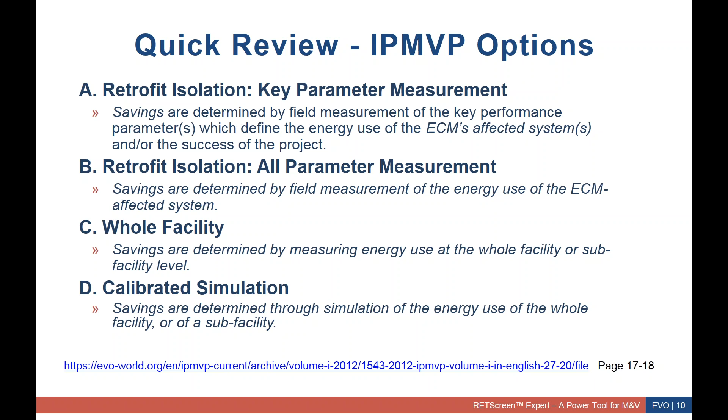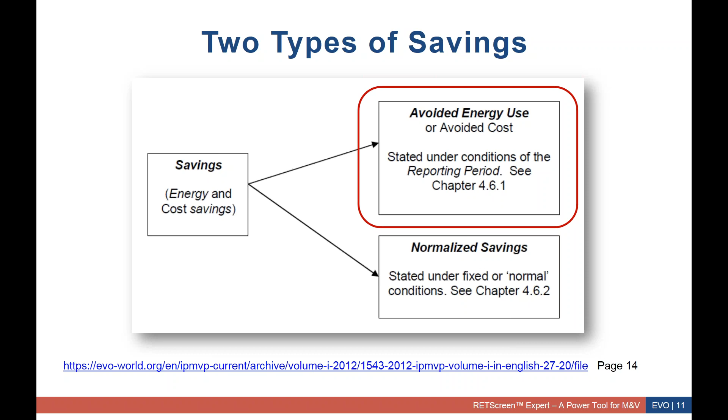On the next slide, I just want to make a point, referencing this again back to IPMVP. There really are two types of savings: savings stated as normalized savings, or avoided energy use, avoided consumption, avoided cost. In RETScreen, we are largely going to focus on the first type here, that is avoided energy use and hence avoided cost, stated under the conditions of the reporting period but measured against the baseline performance. So just to reference us in this, again using IPMVP as our reference here.

Kevin, over to you. Later on in the webinar here, we'll actually share with you a paper—some of you may have seen it already. It gave rise to this webinar. In that paper, Kevin actually broke down how energy would be M&V'd using RETScreen, and that's the next slide. We'll give that paper a reference later on. I think it was in the announcement for the webinar as well.

Yeah, thanks, Stephen. So the genesis of this webinar and the paper it comes from is that one of my roles in RETScreen is to help customer support. When you write to our general RETScreen inbox, I'm one of the people who gets those emails and reads them. Over the years that I've been working in RETScreen, as M&V has taken off and grown in popularity, and people are doing it more and more, I saw a lot of questions where people would do option C, the performance analysis—we had RETScreen Plus many years ago that came out and did that. But there's other options in the IPMVP M&V method, and when people would ask questions, I would always turn to the parts I was familiar with in RETScreen to help answer them.

I sat down with my colleague, Farah Sharif, and we said, is it possible to go through the other options—A, B, C, and D—with the various parts of RETScreen that would satisfy those options in terms of determining savings. What we realized is that as RETScreen has grown over the years, there's lots of different parts of the software that aren't necessarily known to everybody who may be focused mainly on performance analysis and baselining. So we decided to describe that.

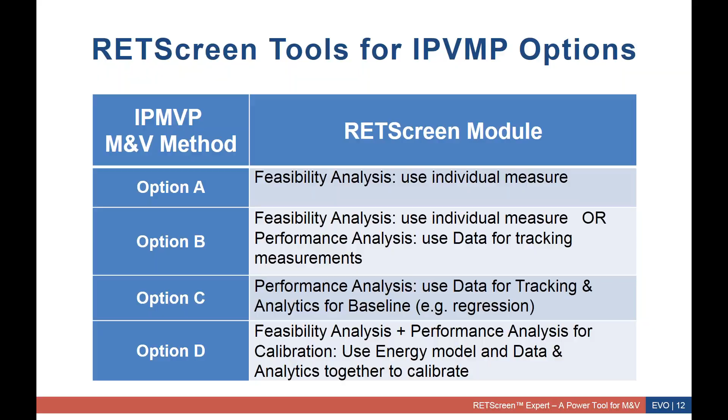So the next part of the webinar, we're going to show an example for each of these four options. So let me do that right now.

Just as a quick overview, I'm going to jump into the software in a second here. For option A, the isolation method, we're going to consider a lighting retrofit. We're going to switch to a more efficient light source, and we're measuring the watts, the electricity load on the lighting system. We'll say the hours of operation—we're not changing anything else. We're not putting in occupancy sensors, we're not changing how often the lights go on and off. All we're doing is changing the lights themselves.

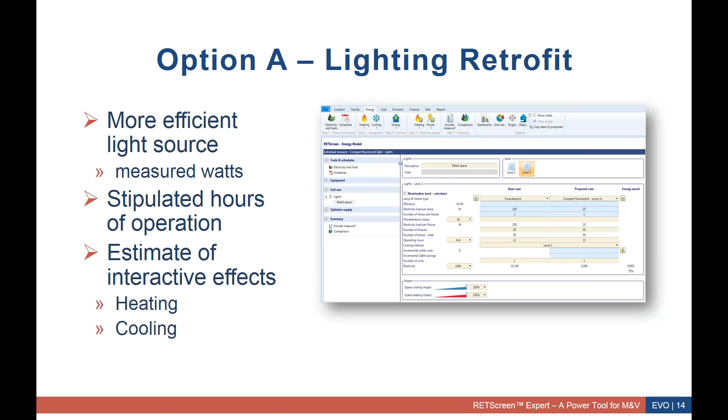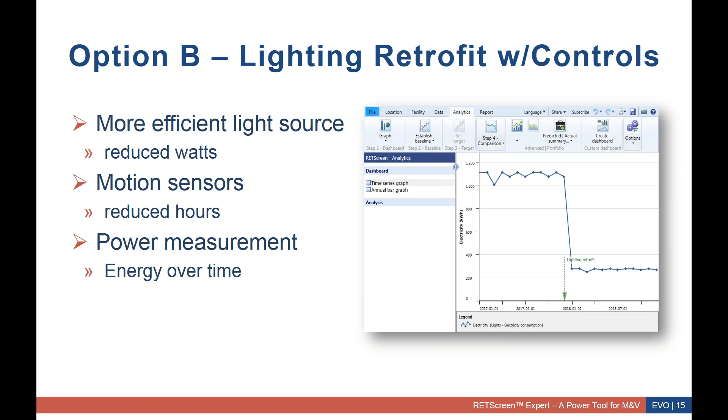We'll also get into a brief discussion on the interactive effects of lighting being in a building and how that affects the heating and cooling as well. Then we're going to look at what if we change more than just the lights—say, a control system as well. So in addition to reducing the number of watts, we're also reducing the number of hours those lights are on, and we'll measure the power measurement, the energy over time. So let me jump into the software now.

So I have RETScreen open, and I'm live in the software now. What I'm going to do is option A, a lighting example. That means I don't necessarily want to model a whole building, I'm going to do an individual measure.

If you look at that table I showed before, option A has beside it 'feasibility.' I could either start with a blank feasibility, or I sometimes like to use just an individual measure here. So I'm going to click on individual measure on this right-hand menu, and RETScreen will load up a blank individual measure template for me. It locates the project and puts in some climate data. We have a couple of videos describing what's on these various pages, and we can also go and describe the facility.

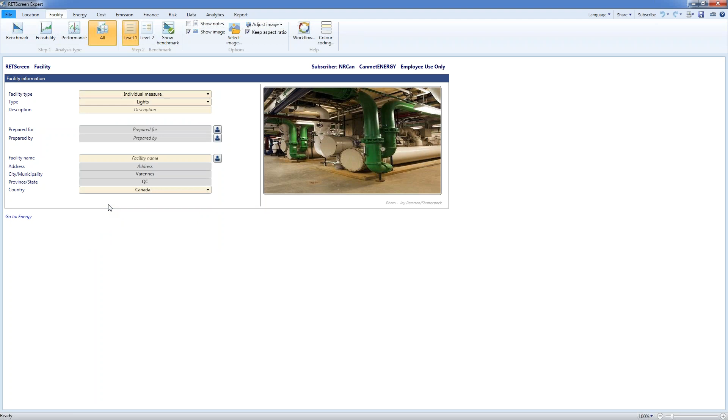In our case, we're going to do an individual measure, and we're going to be changing the lights. We should probably put in some information about our particular project. We can even take a picture, say, down the hallway. Let's suppose we're looking at a lighting retrofit project, changing out some lights in, say, a retail space. So now the main part of the energy modeling is done on the energy page in RETScreen.

I'm going to zoom this up a bit so everyone can see. On RETScreen, you start off and make sure that we have our electricity and fuel. A lighting project obviously takes electricity, so we'll make sure we have our proper electricity rate here, 10 cents.

We won't use the schedules quite yet, and we don't need to worry about heating or cooling equipment. But as you'll see near the end of this webinar, you really can build out a whole building, a whole facility, using all of these options. We're going to be focusing just on lighting here.

So I'm going to go to Step 3, end use, on the energy tab and click on lighting. You'll see the various individual measures we spoke about are here - building envelope and ventilation, electrical equipment, hot water, pumps, fans, motors, VFDs, and so on. There's a lot of things here. Let's focus on lights for now.

So let's click on lights, and what will happen is RETScreen will load up the lighting submodel. This is the lighting submodel here, and we have the opportunity to write a description. So we're going to say it's a light retrofit, for the EVO webinar, in the retail space.

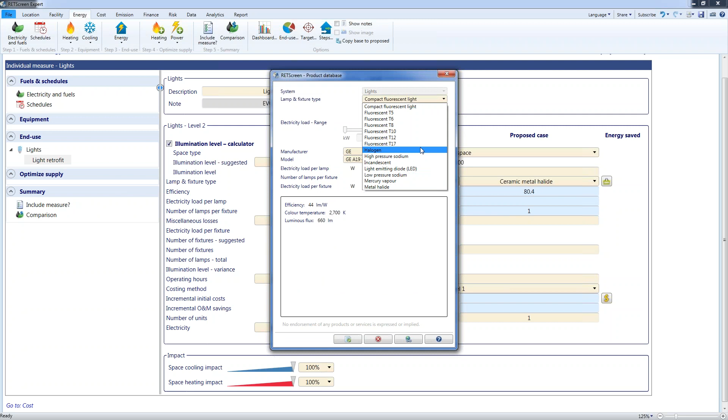As I change some of these values, RETScreen will automatically, from its lighting database - remember I mentioned we have a product database - put in a generic or typical lighting efficiency for an incandescent bulb. And if I click on this product database, I have access to a whole plethora of various lighting types and data points in here, a couple thousand different entries. And of course you can customize that with your own.

So let's continue down this base case. I have incandescent bulbs, they're 100-watt bulbs, and there's 1 lamp per each fixture in the ceiling. I don't have any other losses to worry about. And I go around and measure, say, my corner of this building, the store, and I see that there's 30 fixtures.

RETScreen will confirm that there's a total of 30 lamps being used, because there's 1 lamp per fixture and 30 fixtures. I go around and know that this building is open for 12 hours a day. So after I've done that, RETScreen calculates that the electricity required for this lighting, these incandescent bulbs, 30 of them, for a year at this usage rate is 13,140 kilowatt hours. So now let's do the proposed case.

What we're doing is an energy efficiency measure. So let's see what we're going to improve and change out the bulb. The first thing we say is, can we get away with a few fewer bulbs if they're more efficient? We say we're actually over-illuminating here. Maybe we really want to keep this at 500 lux.

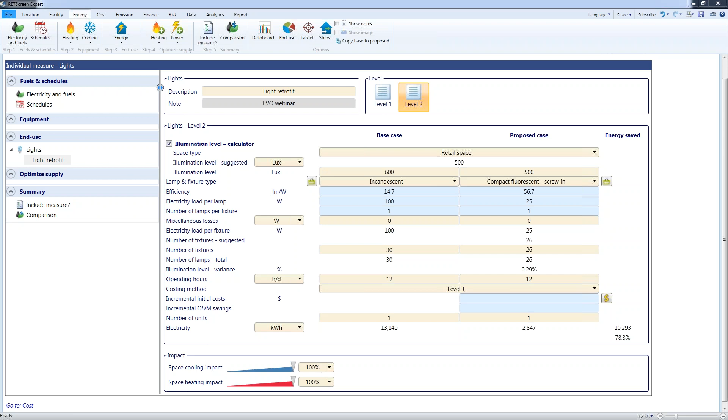I'm going to basically start off where Kevin finished up. So here's our retrofit. Now, Kevin mentioned earlier that you can, in fact, build a whole building and simulate the entire building. We'll see that in a moment—excuse me, I need to show my screen here. So where Kevin left off, we can simulate an entire building, but in this example we're going to start out with this single measure that Kevin created, and we're actually going to build the building around it.

But in order to estimate the impact of the interactions between cooling and heating, we will not need to build an entire building. We simply need to create a valid heating and cooling load within the building, which these lights can then interact with. So I'm going to begin by moving up to the electricity and fuel section and making sure that I have electricity and fuel specified here.

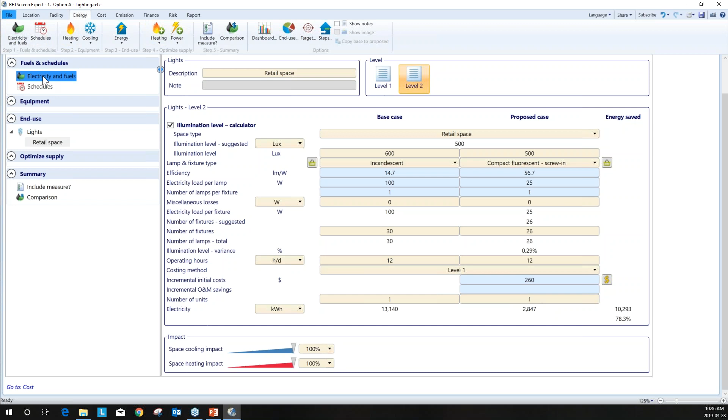So I have natural gas as my heating fuel, electricity as my operating—obviously the lights, but also the cooling systems. In order to build out a building, I need schedules. So in this simple example, I'm going to specify a 24/7 schedule where we're heating the building to, say, 20 degrees C, 24/7, and in cooling season, we'd be cooling it to a temperature of 24 degrees C.

Now, recall that when Kevin started off this project, he identified that there was a location here, and that location will specify for us the climate data.

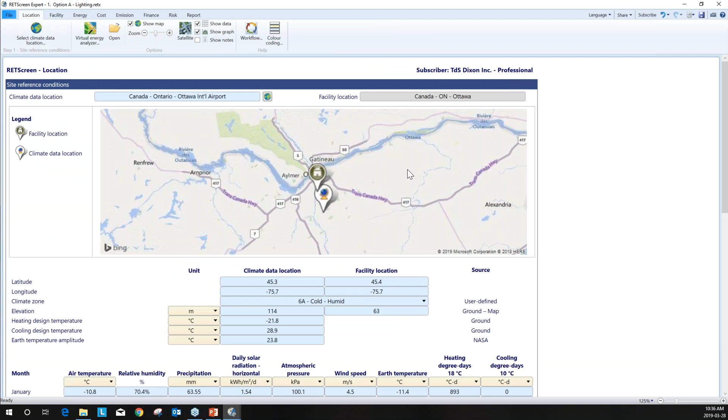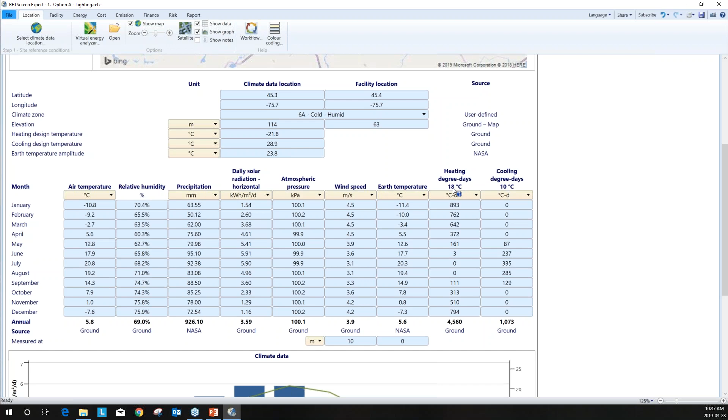There were a few questions earlier about whether RETScreen can deal with different locations. RETScreen has a climate database that covers the entire world. When we move into the option C example, we'll be working with weather data - that's actual weather data, not the long-term averages which is what climate data represents. RETScreen uses a NASA database which covers the entire world at a half degree by half degree grid, so wherever you are in the world, you can get data for your particular facility, which saves a lot of time.

Back into my energy simulation. The next thing in the schedules I have to do is tell RETScreen when this building moves from heating to cooling. This isn't exactly a balance point temperature for heating or cooling, but it's akin to it. In this case, we're going to specify a number of 16. If our building moved from heating to cooling at a higher or lower temperature, we could adjust that slightly back and forth from this point. But this is a good starting point for this particular kind of analysis.

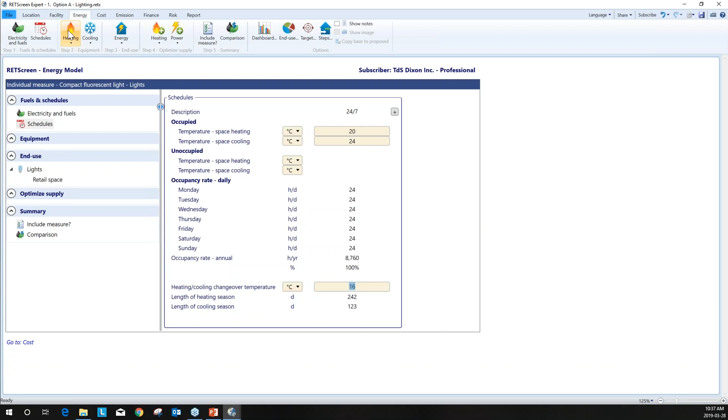So now we have schedules and fuels. Now we need to put a boiler into the building to heat it, so I'm going to add a boiler. RETScreen can allow us to provide a lot of information about a boiler, but we don't need all of that for the actual simulation we're going to do. We simply need to know the fuel to heat efficiency of the boiler, so I'm going to use a number like 75%. RETScreen also makes it easier for us to make our base and proposed case the same, so I'm going to copy base to proposed to make sure these are identical. Now I have a boiler in the base and proposed case of identical efficiency.

Next, I'm going to add a cooling system. I'm going to use, say, a rooftop unit driven by a compressor - we could call this the RTU cooling. Again, as with the heating system, I don't need a lot of information, just the key information as to the performance or efficiency of this particular piece of cooling equipment. I can specify it as an EER ratio or as a COP.

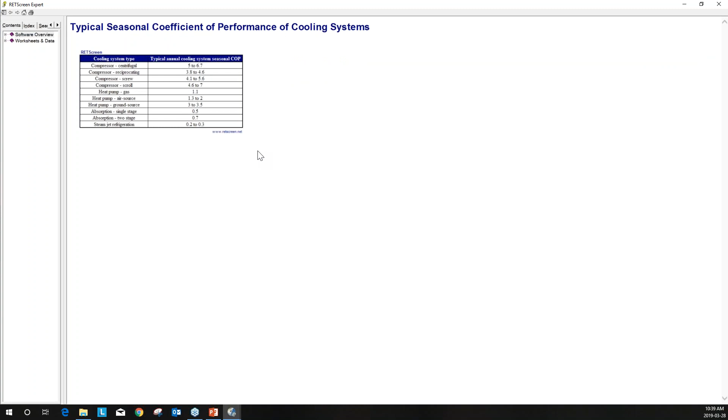If you're in doubt in RETScreen as to what these values might be for your particular piece of equipment - obviously if you're doing M&V you're going to have a lot of data - but there is a lot of useful help in here as well. You can click on the label, and RETScreen is available in 32 different languages now, so a lot of this is going to be easy for you if English isn't your first language. Here we see a table of suggested values for COP for a cooling system, so even if you're in doubt, you've got a starting point here.

Obviously if you're doing M&V you're going to tie these numbers down pretty tightly, but it's certainly a good starting point in any event. I'm going to go with a COP in this case of 4.1 because I know that's what it is. I'll dial 4.1 into the base and proposed case, or I could have used copy base to proposed. So now I have the schedules, the fuels, the boiler for heating, the rooftop unit for cooling - so I'm left with one thing in addition to lighting.

I need to have a heating and cooling load. The way I'm going to simulate that - I could build out the building heating, go into energy and build a building envelope and add ventilation, add hot water - but the simplest way I've found is to actually create a ventilation load. There are a couple of ways to create a ventilation load in RETScreen energy load.

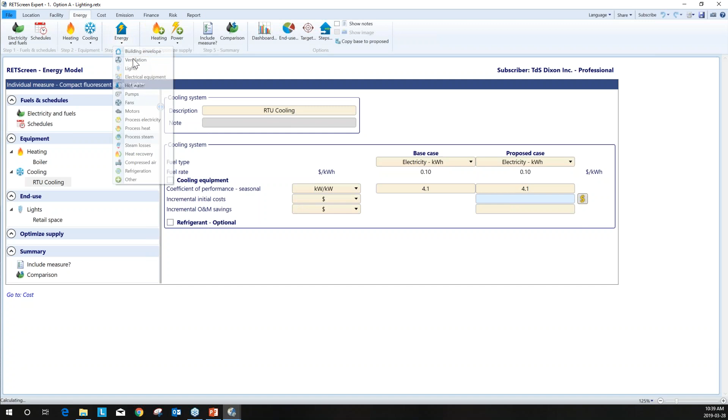One is what we call method one, which looks at basically a mixed air system. It has a lot of features in it, a little more complicated than we need for this simple example. So I'm going to click on method two, which allows us to simply specify an airflow rate and a schedule. Here we have system selection - we can pick whether for this particular load we're heating, cooling, or doing both. We're going to do both. We have one of these systems, and we can specify our units of measure - so if we like CFM, we can use that, or we can use liters per second.

I'm going to go with a system that's got 24,000 liters per second, a pretty large system, because I want to make sure that my heating load is greater than my lighting load in this case, and my cooling load likewise. Now, obviously, in the buildings you're doing the M&V on, and calculating the interactions, you need to validate that, but I think this is a reasonable value at this point.

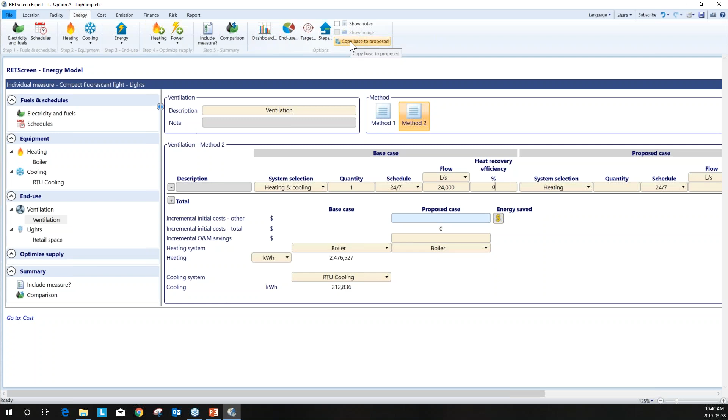We don't have any heat recovery in our base case, so I'm going to copy base to proposed. Now we have a proposed case as well. We're not changing the system, though we could simulate putting a heat recovery system in, controlling airflows with a speed controller. But really what we're after in this section is to determine a heating and cooling load, and RETScreen has done that for us. Here is our heating and our cooling load.

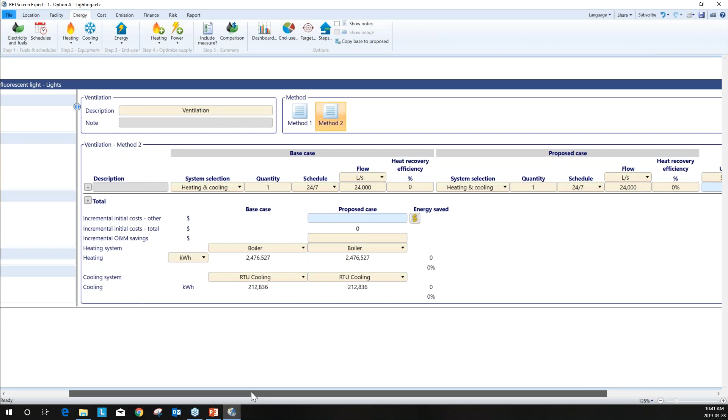Now we're ready to examine the impact of interactions from our measures, being the change in lighting system. So to do that, I'm going to go back to my include measure screen, and I see that now I have my ventilation system, and I've got some negative numbers here. This is kind of strange - it's a common thing people ask me, why do I have negative numbers for my energy saved in ventilation? Well, it's because of these interactions.

I'm going to go back to my lighting example here, and what I'm going to do is set the interactions on these little controls at the bottom of the screen to 0. So I'm saying, look at this lighting system in isolation without interactions with the rest of the building. I go back to my include measure screen, and I can see now there's no interaction here - I'm getting the same result that Kevin showed us earlier. Energy saved is the same. But now, if I turn on these interactions, I could do it one at a time.

I could go in and turn on the interactions for heating. So I'm going to go down and turn heating on, saying that this lighting system 100% interacts. Now, if I know the type of air handler I have, maybe the lighting loads are extracted before they can contribute to the building heating, then I would use this controller set somewhere between 0 and 100. But in this demonstration, I'm going to go with 100.

And now I see that I've impacted my ventilation to the tune of 5,684. So I've actually cost myself energy by removing that lighting load, which was contributing to the space heating of the building. And then I can do the same thing on the cooling side.

So I'm going to go back to my retail space here, turn off the heating interaction, turn on the cooling interaction, and go back. And now I can see that I've actually generated an additional saving - this is energy saved, 2,894 kilowatt hours. And if I want to know what that is in terms of what I'm purchasing, I click over to fuel saved, and that means, at a COP of 4.1, it's 706 kilowatt hours.

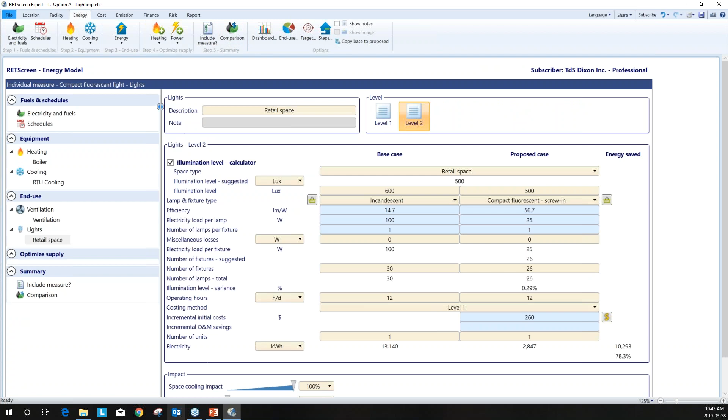So I can look at this whether it be at the point of the load or at the point of purchase. Now I go back into my retail space and turn both of these on, so now I have both interactions if they're both at play. Many of you would only have cooling, obviously, but it depends on your locale, and you can set the situation up as you want it.

So here we see the electricity savings of 10,293 that Kevin generated with his lighting retrofit, and now we actually increase our energy use on the gas side by 5,684 equivalent kilowatt hours, but we save an additional 2,894. So now we've accounted for the interactions, and in fact that would all be rippled through in these calculations. Now, some people would say this stuff's a wash - assume it's a wash, and it may be. But the point is, with RETScreen, you can very quickly determine if it's not a wash.

And depending on the jurisdiction you're in, the price of energy for gas or heating and your cooling energy, or maybe you're in a purely cooling environment, you want to take into account that additional and verify savings for the additional cooling load reduction - this is a great tool to be able to do that.

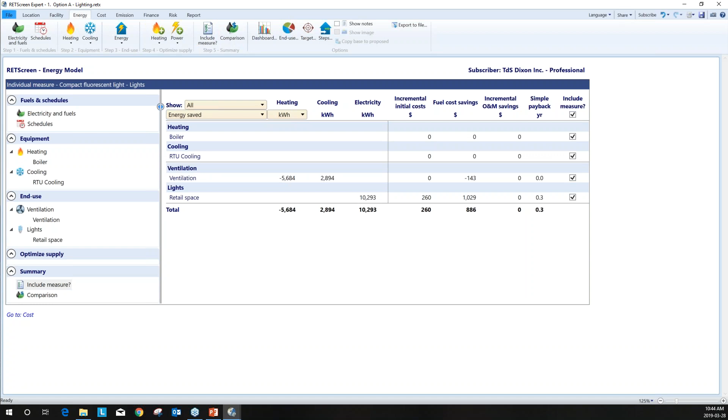So I guess, Kevin, at this point is probably a fair time to stop, and maybe you've been monitoring the questions here a little bit. So why don't we have a few questions before we go any further? I agree, yeah. And one of the questions, or a couple of questions, have revolved around the fact that, you know, what if you have multiple projects of lighting?

And when you do this project, you really will need to rewire if you're actually changing from 30 to 26. That's absolutely right. We've kept this simple on purpose, but even within option A, there's nothing preventing you from building this out and adding more components.

So if you can see my screen here, I have... actually, I don't think I've given you control there, Kevin. Let me flip back to you. I don't see you on the list. Oh, maybe, hang on a second. Monitor 2 there. Everyone should see my screen now. There we go.

Okay, so on my screen here, you'll see the example you were just working with, Stephen. So we have this one retail light. One question was, well, I don't want to piecemeal my whole building. I have maybe a larger lighting project, and maybe all those lights are sub-metered, and that's how I'm going to do this measurement. So there's nothing preventing you from adding additional components.

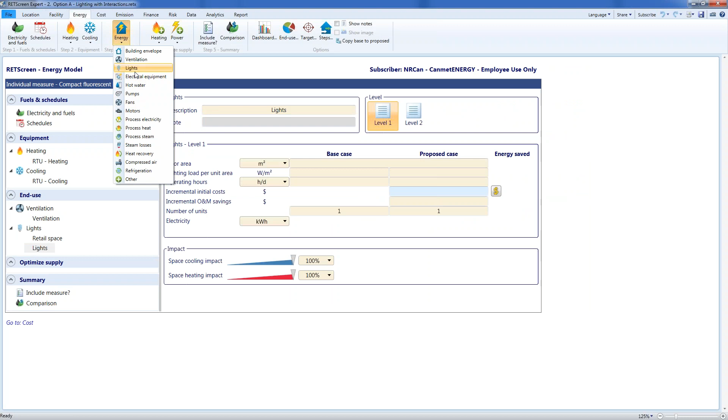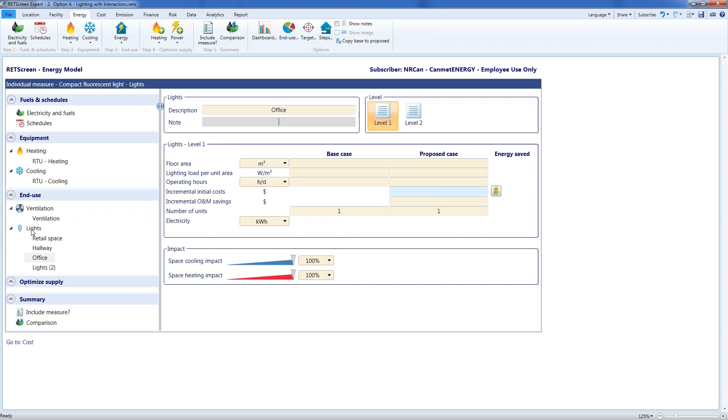Just as Stephen added a heating system, a cooling system, and ventilation, I can add multiple lighting systems. You'll see here lights, say this one is the retail space, this is the hallway, and this is the office space. I'm not adding details to these, but I can have multiple lighting measures, and if I click in this left-hand menu on the header for lights, I can get an isolated view of all my lighting measures, an aggregate view of all your lighting projects, and still apply option A to it.

The other question was about the cost associated with it. Let me go into this retail space. I did skip over this, but I mentioned there's a cost for relamping, installation, and rewiring, and that is all taken into account. I didn't show this database, but if I click on this cost database, we have the initial cost for all these different types of lamps, installation costs - high, medium, low - and the lamp life hours.

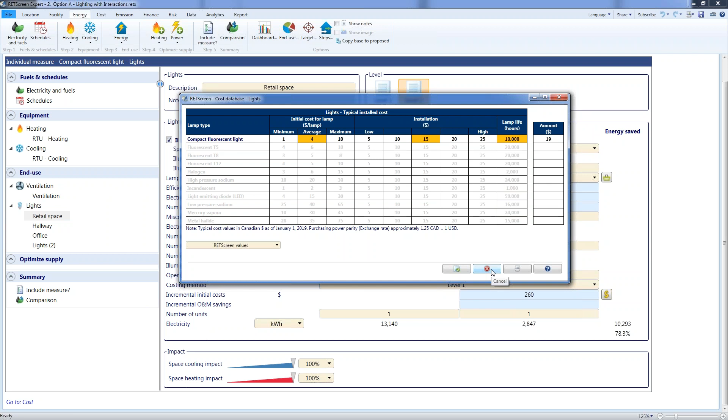That's a huge thing as well. If you're changing from halogen or incandescent lamps with a relatively short lifespan to lamps with 40, 50, 60,000 hours, even just the relamping cost for, say, a large hotel - the amount of time it takes to relamp is significantly reduced, and that is part of the cost as well. So relamping and costing is also included here.

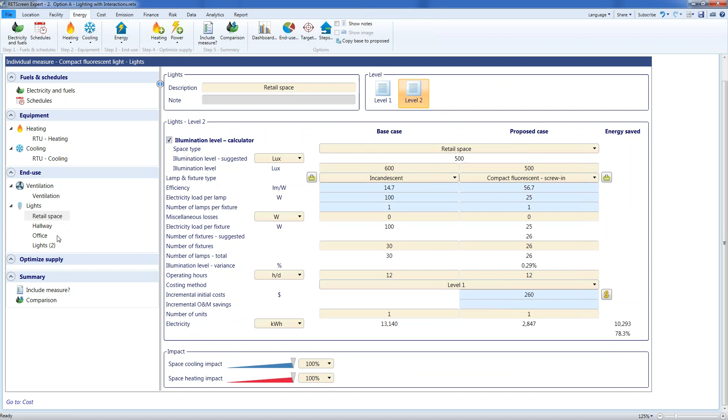I have here a simplified level 1 view, but I can go down to level 2 and see how much the lamps themselves cost, other costs like the electrician, and what the lamp life is, and so on. So I really can get into the weeds, into the details of my project, and you can do this for each of your lighting projects and have a complete view of that.

Let's move on now to look at option B, which is instead of just changing the lamps, I've put in a motion control system. So the occupancy or operating hours of the lamps is going to be variable. Instead of just isolating one thing, I'm changing multiple things.

I've come back into RETScreen here on the home page, and you'll see we're going to stay with individual measure, but so far we focused on the feasibility side. Let's now bring in the performance side. So what we're going to do is start tracking the energy.

Let me just show you - I have here a file. We've collected some data from a sub-meter, and this is just a simple example. I have some monthly data, but this probably would be daily data for the electricity consumption, isolated. Again, this has to be isolated data for it to be option B. You'll see here I have the electricity per month.

And what I'm going to do is I'm going to now track this in Retscreen using the performance analysis. So I'm going to close that and go into Retscreen. You'll notice these tabs up here, data and analytics, so I'm going to go into the data tab.

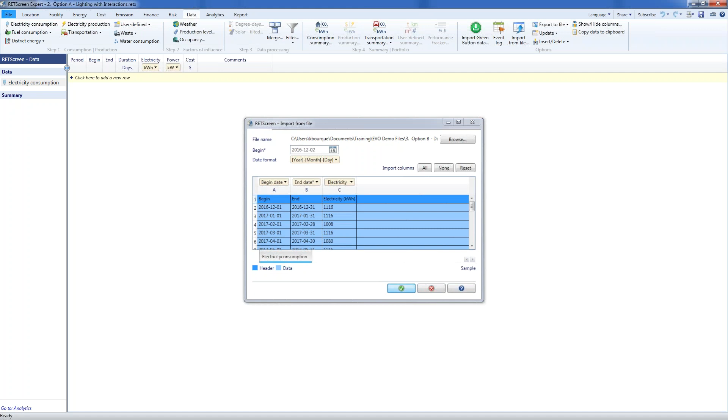So I'm going to click on import. Let me just find my window here. Okay, I have import, and this is the file here, option B, data for import, and we'll see that Retscreen identifies what the begin date and end date are, and the electricity data. Let me redo that. Let's re-import this data, and Retscreen will identify, based on the columns, the begin and end date, and what's in this electricity column. I've looked at this, it's okay. I'm going to click OK, and Retscreen will import this into its data sheet.

The other thing Retscreen has that I like to mention is there's also an event log. You can import data here, but it's a great way to say what's been happening in your building. So we can say here maybe that this lighting project happened at the end of 2017. In December of 2017, on the 1st, there was a lighting retrofit. We can put in the status, is it completed, is it paid for, etc. You can add different columns here. So we now have two things: our electricity consumption and an event log.

So now let's go into the analytics tab, and Stephen's going to spend quite a bit more time on this. We're not normalizing this data - I've seen a couple of questions about, oh, what about normalization? We're going to get to that. But let's just analyze this straight as it is.

So I'm going into the analytics tab, and the first thing I'm going to do is create a time series graph. I always like to start with a time series graph just to see the data I'm working with. So I pick the electricity consumption table, and I throw the electricity consumption into my graph, and I see very clearly that the electricity consumption used to be up here, this monthly data, and it took a precipitous drop and went down here. We can obviously guess that this is when the lighting project was.

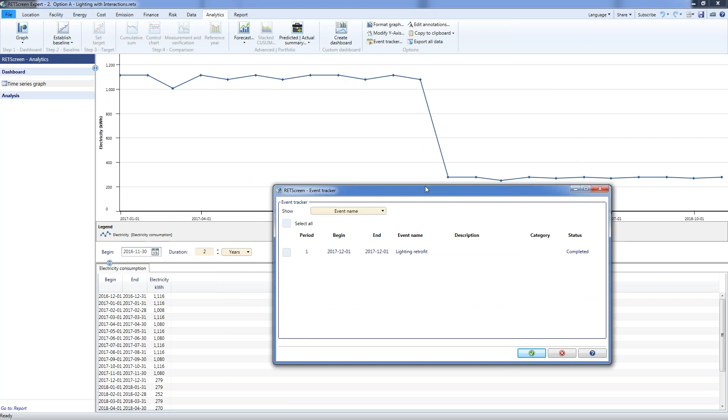But in Retscreen, we can overlay that event tracker. So if I click this button up here called Event Tracker, I click on the events that I'm interested in, and Retscreen will annotate or overlay on the graph the various events you've selected. You can hide or display those, and we can see that the lighting retrofit really does line up exactly with this reduction.

But the question is, for option B, so what are those savings? There's one thing important to keep in mind: when we're doing this energy model, it's on an annual basis. Retscreen calculates monthly, but the results are shown on an annual basis. So these savings numbers here, this fuel saved or energy saved, these numbers are annual numbers.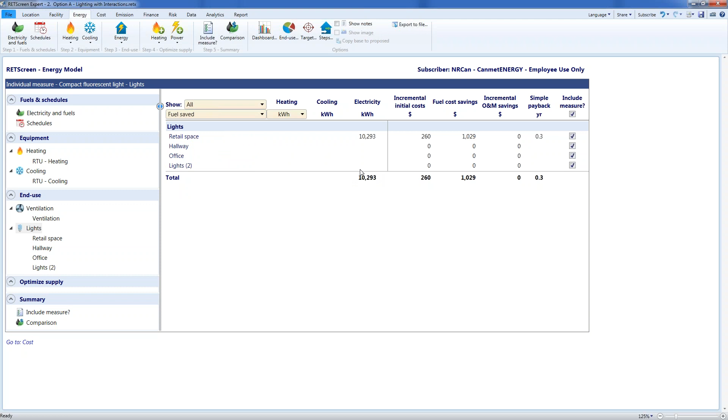So in RETScreen, when you're collecting the data, the way to analyze this is using - I like to use - the annual bar graph. So I'm going to do an annual bar graph here. I'm going to take the electricity consumption that I had. I noticed that this data starts on December 1st, so I'm going to use December 1st. I'm going to click on OK.

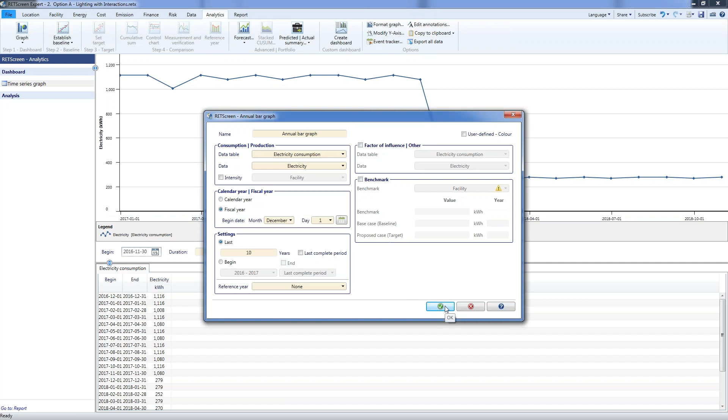And we'll very clearly see here what this is, an aggregate of the data that we saw in the time series. The first year of operation, we had 13,140 kilowatt hours, and the second year is 3,200. Those correspond to the same numbers we would have seen before.

And if we go into this graph, if we add a reference year - so the reference year would be my base case, what year do I want to compare to - RETScreen in this table below will calculate what those savings are: 9,855 kilowatt hours are the savings as a result from the difference between the base year and the proposed year.

So this is taking a data-driven approach to option B, and I'm going to stop there so we can move on maybe to the rest of the webinar and answer one or two questions.

I see in some of the questions people are asking about lighting controls, occupancy, daylighting, and what measurements are made. That's what I was trying to show: when you have multiple measures, probably the easiest way under option B is to simply collect that data. Remember there are other options in RETScreen that you can use to do those as well.

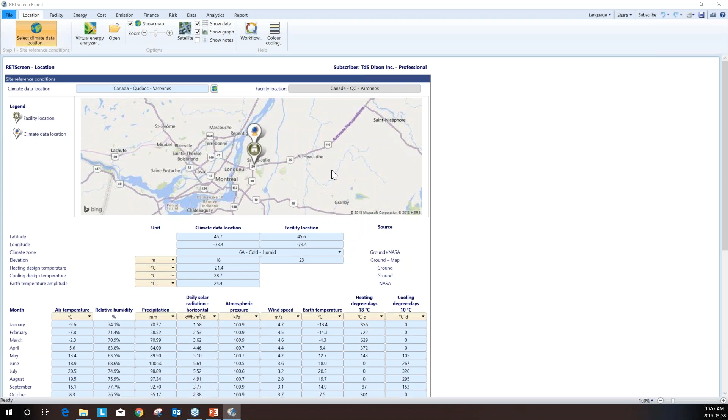Now, what I'm going to be accessing here is not climate data, I'm going to be accessing weather data. It's important when we put our pin down on the map and access the particular location that we're cognizant of elevations that are close by, changes in elevation, and bodies of water. What we're actually doing is placing this pin in a half degree by half degree box. Over on the right hand side, you can see the lat and long coming up, latitude and longitude.

But if we happen to be in a box that contains a lot of water, and our building is not over or close to that, then we could skew the data a little bit. So we have to be careful in picking our weather station location. I'm going to lock this weather station in, and I'm going to go ahead and tell RETScreen to figure out where to find that data. So it's actually going to lock it in.

It actually brings in climate data, but this is not what I'm going to use in this particular example. So in this example, it is a multi-unit residential building, so I'm just going to set it up for that.

And I'm not going to do any benchmarking in this example, I'm going to do performance analysis. So I'm going to simplify my interface now to focus on location, facility, which we've already done, data analytics, and eventually a report if we need to create one.

So I'm going to move over to data here, and the first thing I'm going to do is establish the weather data table, which is empty. Then I'm going to ask RETScreen to go to the NASA satellite database and download as much data as I need.

Now, I'm trying to remember how far back I've got to go, but I'm going to go back to 2007. I think my example comes from around 2008 or 9, but I need to make sure I have enough daily data. A number of people have asked about data here.

This is daily data for any location on the surface of the Earth within a half degree by half degree box. So I'm going to go ahead and cross my fingers and hope that all the data comes in here.

Whenever you go looking for something on the cloud, you always have to have a little bit of faith it's all going to happen, but I think it's going to go well here.

And the next thing we hope to see here then is daily data going back to 2007, January the 1st. And it's updating it, and there's our data. So it tells me that there's a few missing values.

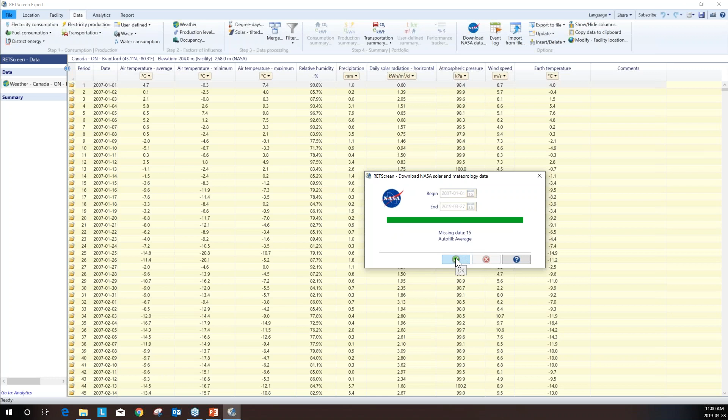They're likely in the precipitation column, and what it's going to do is average one day to the next, which is entirely acceptable to me. So I click OK. Now, in this example, because I'm analyzing a boiler, I'm going to need degree days.

So the next thing I can do is actually have RETScreen compute the degree days. So I can actually compute both heating and cooling, or one or the other, but I need heating degree days as an example.

I can either use an average temperature method for this computation, or I can use, as specified in ASHRAE, a max-min temperature method, which happens to be a lot more accurate during shoulder seasons when we're crossing through the balance point.

Now, one thing people always ask me, Steve, how do you know what balance point to use? I don't. The building's going to tell me that. I'm going to let the building tell me what the balance point is, and I'll show you that when we get into RETScreen.

Because there's tools in here which allow us to find, for the data we have, what the balance point is. And every building is going to have its own unique balance point. So gone are the days of using degree days to 18 degrees C, which may not work in this building.

So here we go. I'm going to go ahead and calculate those, and RETScreen will insert them over here on my first column. So there's the daily degree days.

Okay, my next step is to go and get the gas consumption data that I want to work with. So I'm just going to show you the data that I'm actually going to import here, just so you can see. Very similar to what Kevin showed a little bit earlier. Just to pull this into context properly.

So here's my gas consumption data. So I need a meter reading date, and I need gas consumption. So here we have our gas consumption, right, on a monthly basis.

And again, one thing I always stress is that the meter reading dates are very important in here. So if you're doing this, don't kind of approximate it. You've got to have it, because you're dealing with daily data in this particular example.

Okay, so my next step here will be to actually import this data. I'm going to close this file. I'm going to use a user-defined import from file, which is a simple way to do this. And I'm going to go and grab this raw data file in Excel, and pull it up.

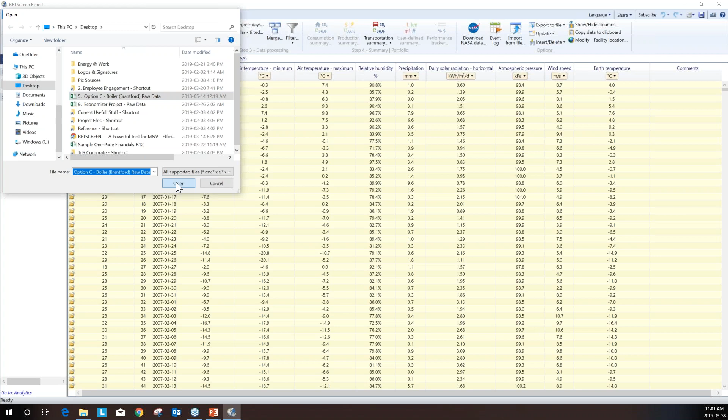Okay, now at this point, RETScreen has looked at the data, says I can understand this is the end date, the reading, this is the user defined. I'm using a format for the titles which will allow it to interpret it properly. I'm just going to call this building gas data, just so I have a table that's labeled properly. I always like to use the labels.

RETScreen has even had a crack at coming up with the previous reading date, and I'm going to go along with that one, or I'm going to move it back one day. RETScreen's pretty good at estimating what that is when I don't give it a begin date, but in this case, I adjusted it by 1 day.

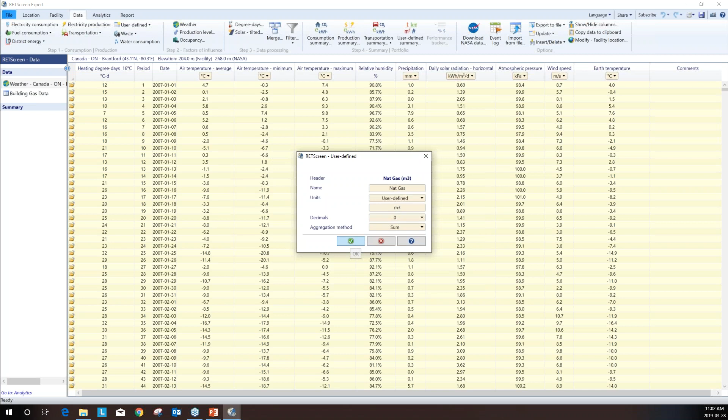I'm going to go ahead and import this. I'm going to tell RETScreen I don't need decimals, and it's interpreted my titles properly. Natural gas meter cubed is the units. Go ahead and check that. And now I have a table which contains the natural gas data.

For any of you who've done this next step before, you'll realize how much effort this is going to eliminate. RETScreen will very quickly merge the daily data into the monthly data for the dates I have here. I'm bringing over the degree days, so the function is merge. We'll click on that, and we're going to specify we want to pull it from that data table from Brantford, which is the weather table we created. We don't want the average temperature, we want the heating degree days, and we're going to go ahead and click OK.

So now RETScreen has actually calculated the total degree days for each of the periods. One thing people are concerned about too is what if my meter reading dates aren't month ends? That doesn't matter, use whatever dates they have later in RETScreen. It doesn't even matter if these periods are different lengths, because RETScreen does a weighted regression to deal with the fact that we need to handle the difference statistically. So RETScreen has all the tools to deal with the nuances and complications of real world data.

All right, so we've now assembled everything properly. Just for safety's sake, I'm going to go ahead and save this file so I have it available for later, project 1, just in case. I always like to do a save.

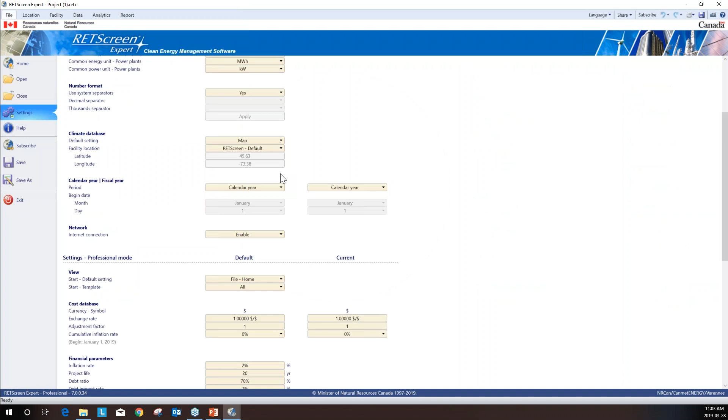One thing I like to tell people is make sure in the settings feature of RETScreen, you turn your autosave function on, and you can save previous versions in the file history. This saves you a lot of time in the event that you mess something up and need to go back and pull it up, or maybe you lose power in your computer. Something goes off, well, RETScreen will actually pull up its autosave file version once you restart, no fault of yours or RETScreen, but these things happen. So there's some good backup features in here.

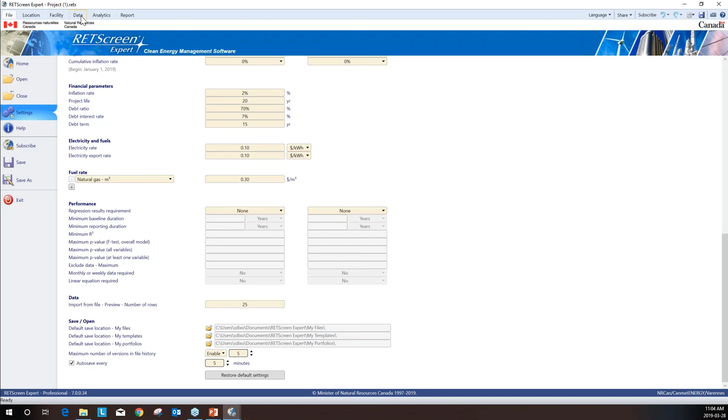So we're back to our data page, and now we're going to begin to do analytics. Our challenge here is that we have to find a baseline, and then determine the savings versus that baseline. So RETScreen provides us with a number of tools to do this, but the one I would typically use in this situation is the basic regression analysis.

RETScreen now asks me what I want to do regression analysis on. I'm going to use the table I created called building gas data. It automatically labels my regression for me, which is kind of nice, and it's found the degree days in there, natural gas degree days. So we're good. Now the last question is duration or daily.

This is where we have to tell RETScreen we're not using data which have an equivalent number of days in each period, so this is where we activate the weighted regression feature. If we went with duration, and I see a lot of people doing this first time through, don't do that, because you now need to use a second variable, the number of days in the period, to properly do the statistical analysis. So we use daily, and that's going to probably be the norm for most of the types of analysis you would do.

RETScreen does have the ability to do multiple variables. We can keep adding to your heart's content, so don't worry that single variable analysis isn't enough for you. RETScreen is more than capable of dealing with those multiple variable situations.

And we use them, typically I find we use 2 and 3 variables. I've once used 4, but the technique I use is what I'd call building it from the bottom up. So you do a regression with 1 variable, and we'll do a CUSUM, and if we can iron out the changes with the CUSUM, then we know we've dealt with all the relevant variables of influence. We keep adding variables until we do.

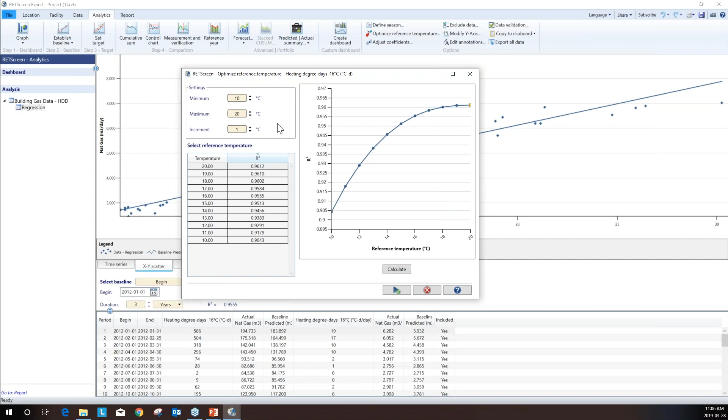I don't know whether 20 is the highest value here. So just for utility purposes, I'm going to click at 30 and do it again. What I want to see is a curve that kind of tops out. Now I see a balance point temperature here of 20, not 16, which the data started with, not 18, which many sources provide, but 20.

My question at this point is, is this valid for this type of building? Is it valid to have a balance point temperature of 20? This is a multi-unit residential building in Canada. This is actually a reasonable balance point temperature. Other buildings may balance at different temperatures, but here we see the importance of actually asking the question: what is the right balance point for my building? This makes a huge difference to the determination of savings if we don't use the right values here.

So I'm going to go ahead and click that. We see it improves our R-squared value. We can also have a quick glance at our statistics here. We've got a T ratio on each variable well above 2, so this is actually a reasonably good model, even as it stands.

But remember, this is all the data for 3 years. And we also have a CVRMSE of 6.9%, which is pretty tight. But it's going to get better — you're going to see it getting better. So there's our scatter plot. We can look at it as a time series, and we can look at actual versus predicted. So this is a pretty good model.

But believe it or not, there are savings buried in this data. So the way I'm going to extract them is I'm going to run a CUSUM chart. I'll show the summation of actual versus predicted value based on the overall model here. I call this an overall CUSUM, an end-to-end CUSUM, but it's based upon all the data. It's like comparing each point to the average, in a sense, because your regression line, in simple terms, is the average.

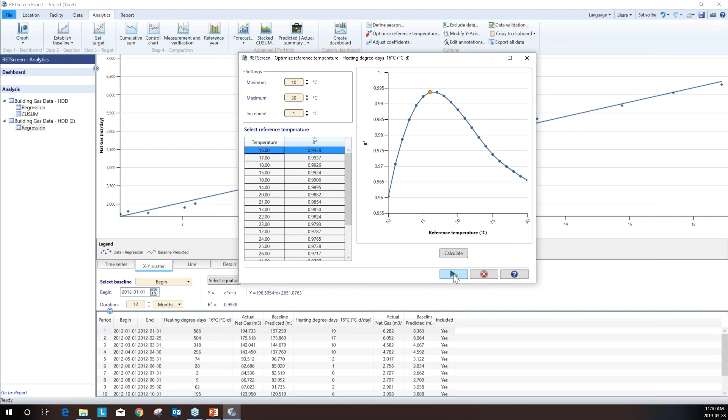So we dial this in. Now we have a 12-month baseline, which kind of meets all the criteria for a good baseline. It's got winter and summer fully represented in our 12 points.

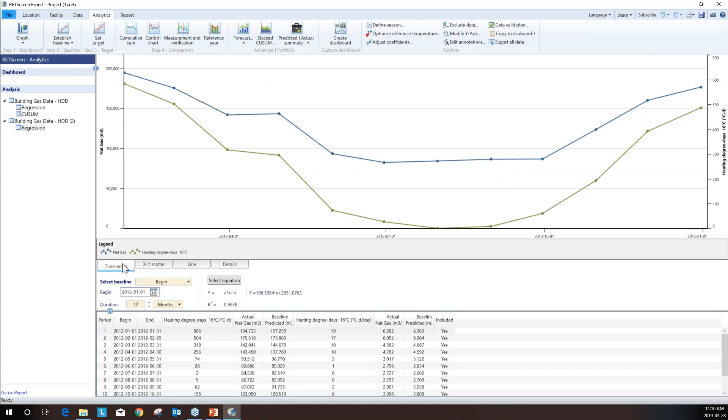When we go to our details, we can see the T ratios and the P values are scorchingly good, well above 2 and well below 5%. We now have a coefficient of variation of the root mean square error, the CV-RMSE, of 2.7%. So the precision of this model is pretty darn good.

And now we can have a look at our CUSUM chart. When we do this, it takes on a whole new complexion, although behind it is basically something similar. The CUSUM chart here had a segment where it essentially went up, maybe plateaued, and headed down.

If we look at this one, it's basically flat, okay? It kind of heads up a little bit, plateaus, and heads downwards.

So one of the things, if you've worked with CUSUM before, you'll realize is that when the CUSUM changes, there's probably a physical change. The other thing you'll recognize over time is that you'll become very comfortable using this as a tool to find change.

It's not the ultimate determinant of the savings necessarily, but it is very useful in actually parsing the data to find when things are changing, because the best baseline obviously is one where we don't have change, right? We really don't want changes that we have to make adjustments for, using some kind of a baseline adjustment to deal with things that were changing in the baseline.

At this point, we're in a position to run an M&V chart. Now the question I would have from this CUSUM is, when did the boiler get retrofitted? Well, my bet would be sometime over in this period right here.

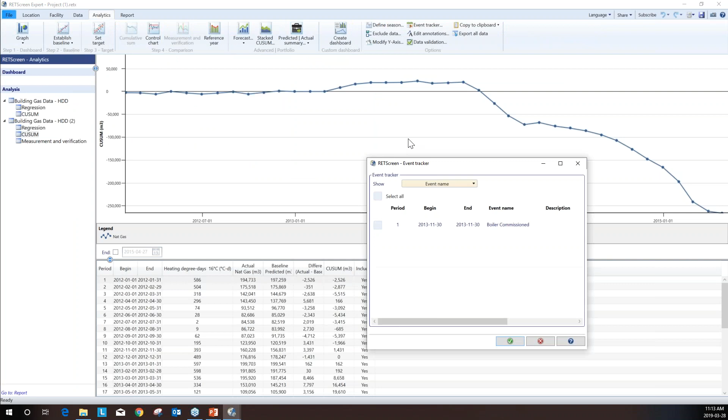Now, if that is when it was, I would go and obviously verify that this was a project that we weren't involved in, but we were asked to come in and measure the savings for, and clearly we'd have to confirm that with changes in the building.

Next step then would be to look at our M&V chart, and in the M&V chart we can turn on the event tracker as well, and here we see the commissioning date of the boiler.

So what we want to do here in the M&V chart is move our commissioning date over to the same point. So we're going to go to 2013, November 30th, and redraw the M&V chart.

So we see our commissioning date corresponding to our arrow, and now RETScreen is calculated for us in the period, the reporting period following the commissioning date, the savings.

Now, if we want the 1 year savings, we can specify an end date. So we take this up, from the end of November for 1 year - I always have trouble with my dyslexia on this, but I'll have a go at it here.

So 2014 November 30th. Now we see a savings of 167,000 cubic meters of gas. A quick check would show this is about 12 to 14% of the consumption of this building, so we're above the guideline of 10% for using option C.

But even if we were below that, I'd encourage people to go back and look at the parameters of their baseline model, the uncertainty related to the CV, because it's possible to move under that 10% as long as we have appropriate precision in the model. So either way, we've got a good determination of the savings - a quick demonstration of how to use RETScreen in option C.

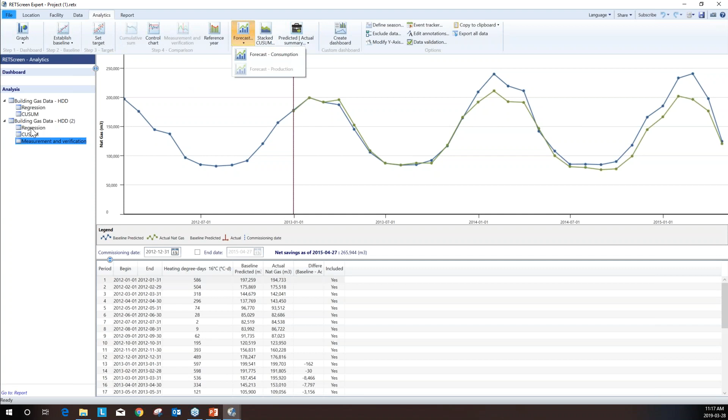The other question that's come up a couple of times is about whether, now that you have this, you can do forecasting. So maybe just click on the forecast button and we'll show how that's now built in - that's something relatively new to RETScreen. Once you have your regression, you can then use that equation to do a forecast.

So what do you want me to forecast there? Here our energy driver is heating degree days, so we're going to forecast our gas consumption. If you click, you now pick what regression, what equation you want. Let's skip ahead to the next screen, because the main thing in a forecast is you have to say, well, what's driving my energy production? In this case, it's weather.

In one of the examples, people mentioned a factory with production. So for forecasting, you need to look into your crystal ball: what's the weather going to be like, or what's production going to be next year? In this case, I'll just base it on climate data that's available, which would be 20-year average data, because that's the best you could do.

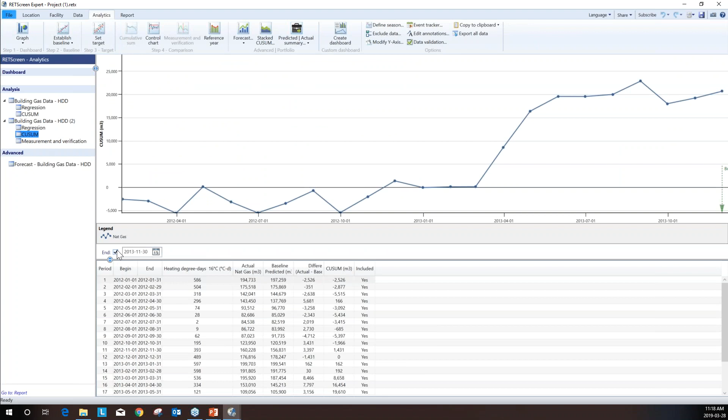We click it and get our forecast for this building based on the regression model I created earlier. Now, if this building had been improved, we'd want to base our regression on the period following the retrofit. So if forecasting going forward, I would not use the baseline period, I would use the improved period instead. But the procedure would be the same.

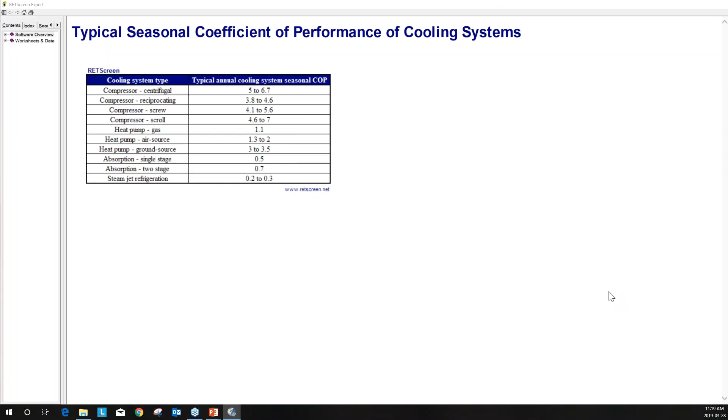Sure. What I wanted to touch on now is using option D. I won't go into the details of doing it, just in the spirit of conserving time, but I'll show the result here.

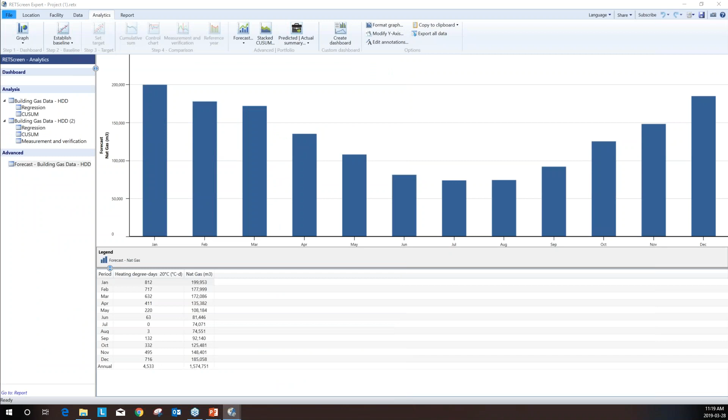Just a second for RETScreen to open up our final model. What I've done here is use the virtual energy analyzer to create a complete building model, for a building in Montreal. The type of building is a simple office building, and we have some benchmark information. This is a good view of what an archetype would present us with, a complete building which we can then tailor and adjust to our situation.

So what I've actually done here is create a complete building, and I can use the simulation tool to essentially show savings.

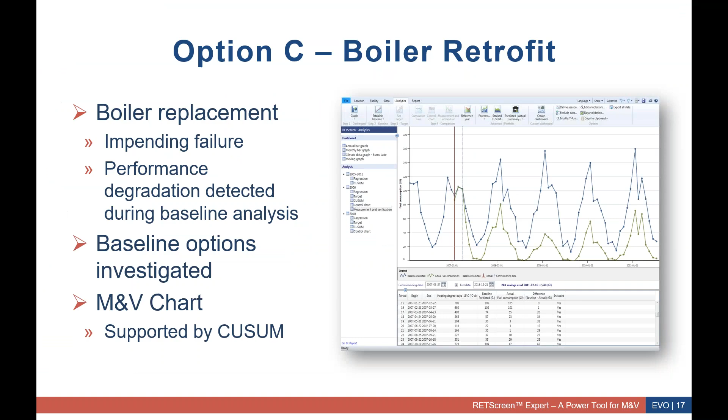You would calibrate it to your historical consumption, what the consumption was prior to or at the time of the audit. Then in RETScreen, as shown before, you'd copy the base to the proposed case, establishing the base and proposed case identically, and then speculate or estimate what your savings would be for measures included in your audit report. That's the way we normally do it going forward.

But in the M&V context, we use the tools the same way. In this case, we model the post-retrofit case as the base case, and just as with the audit, we calibrate to consumption, but to the post-retrofit consumption. So we create a base case and proposed case that are identical, but match the proposed or post-retrofit consumption.

Then we simply go back into the base case and remove the measures that were included in the proposed case, and the difference between the base case and proposed case will be the evaluated savings. It's really the same as we did in the audit, but rather than having a calibrated model in the base case, you have a calibrated model in the proposed case. So really, the view of it is no different.

We're simply using the full simulation capability of RETScreen to calculate the energy consumption of a building. But the one key feature, which you've highlighted in your paper, Kevin, is what we call the verification tool. Here's where we enter the historical consumption, which is 48.95, and this is our proposed case consumption, what we've calculated in our proposed case with the conditions we specified.

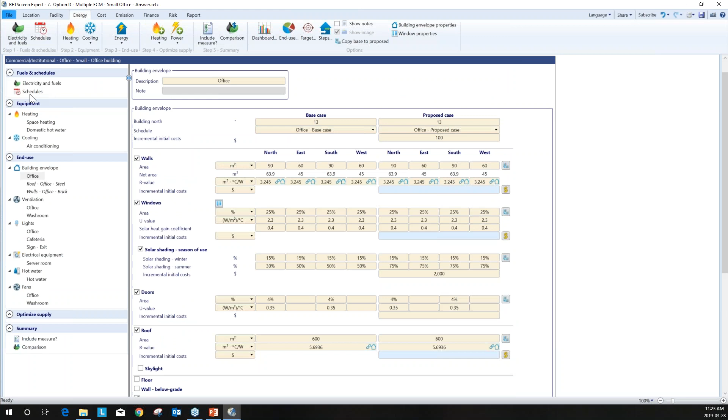All we did in this case was change the schedule that the building was operating under. This is a fully developed building envelope model, and here we have the office base case consumption based upon the base case schedules. If we're wondering what the base case schedules look like, we go over here and see our temperatures and times.

The other thing we changed here was we added solar shading for summer. In the base case, there was 30 to 50% shading on the northeast, southwest windows, but we've moved that up to 75%, and that shows the overall impact.

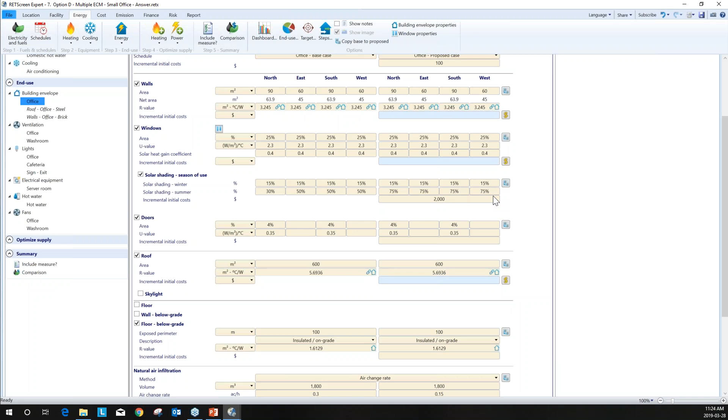The other thing we did here was tighten up the building a little bit, so we reduced some of the air leakage. This isn't the entire airflow through the building at 0.3 and 0.15 air changes an hour—this is just that which occurs as a function of the leakage around the windows, doors, and walls.

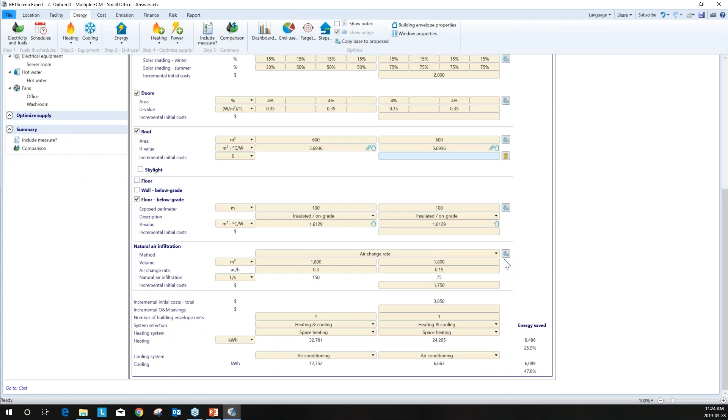But because we've made some improvements and tightened things up a little bit, we can show the savings in the building envelope. So not only do we see in the comparison screen the overall savings for this building, but now in the include screen we can see the savings for each and every measure. These measures are actually interacting with each other as well, because we have a lighting retrofit in the office, and we've got the interactions turned on to the tune of about 70%. So we now get a pretty good idea of what the actual interactions with the entire building are.

So we've done a simulation on the entire building. So Kevin, that's kind of a very quick tour of option D, but I think at this point we've gone through many of the other aspects. Really, it's a matter of simulating your building, and as most people out there know, the quality of the determination in this case comes down to the skill of the simulator and the ability of the tool. So you need to understand, if you're using RETScreen for this, you need to understand the capabilities of RETScreen.

The other piece that helps in the reconciliation is this climate data, right? But we could go back and construct our own data for this table from weather data for the actual year of the post-retrofit. That way we're actually calibrating to the actual weather that occurred outside the building, as opposed to what I've done here, using the 20-year climate data, which would not be anywhere near as accurate.

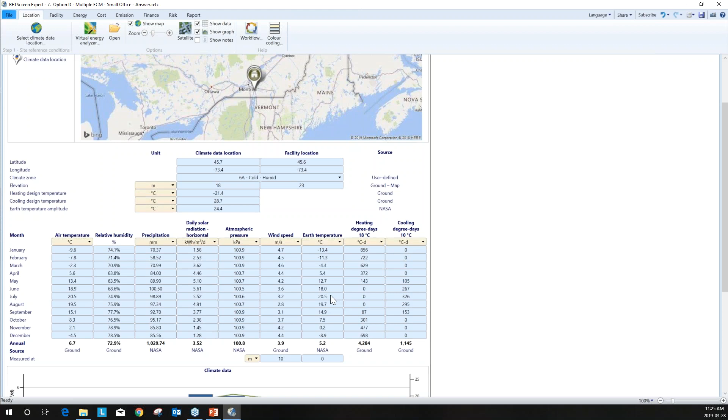Kevin? Yep, that's, yeah, absolutely, that's good.

Actually, on that point about the calibration, there's a really good video coming along—Kevin, you're putting that up as we speak, probably, right? Reconciling RETScreen fuel consumption with historical data. Again, there are a number of tools within RETScreen to allow you to do that, making sure you're using the actual weather data as opposed to the climate data. You're normalizing for other variables like production, like we talked about. Looking at the largest user, there are some nice end-use pie charts you can use. One thing I like to do is reconcile the heating and cooling and electricity total separately, so not just reconcile the total consumption, but that for each of the components, right?

We can make sure we take care with the heating and cooling impact, making sure that we set those sliders properly, making sure our schedules are adjusted, and that we deal carefully and properly with the heating cooling changeover temperature. That is akin to the balance point temperatures.

So there's one more example I was going to go into, which is the idea of making sure that we don't lose savings. I'm going to do it right on the slide here. If anybody wants, we can certainly send this out through EVO.

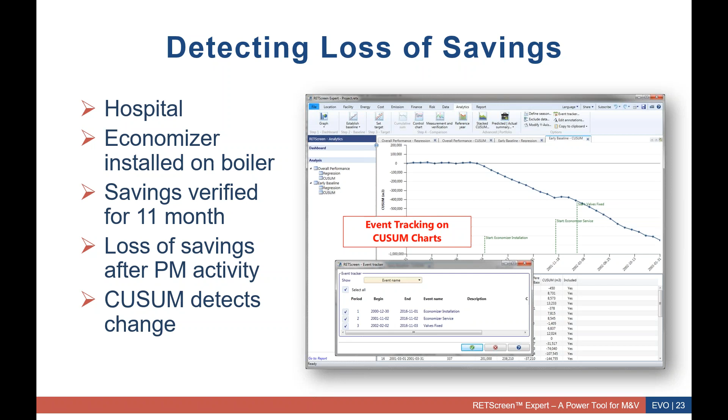In this case, if they had read those gas meters once a week rather than once a month, and had been checking their CUSUM chart, they could have reduced the loss in savings, which amounted to about $30,000. That's what they lost. They could reduce that by 75% with just a little bit of simple monitoring - no more meters, right - using a simple piece of software like this called RETScreen. If you use it to begin with to verify, why not assure savings with it? Back to you, Kevin.

Yeah, that's good. There's a lot of interest, a lot of questions. Some of the questions revolve around data resolution. So what if I have daily data? What about hourly data? My quick answer to that is yes - for the examples here, we've used monthly data or meter readings. But as we saw with the weather data that Stephen downloaded from NASA, the resolution can go down as detailed as daily.

We are working on, and actually have a couple of prototypes already ready for, being able to import hourly data. In fact, especially your utility data, if it's in green button format, you can import it even in 15-minute intervals today into RETScreen. The analysis is done on a daily basis - we're not doing hourly analysis. So the analysis step is on a daily basis, but the data can be in a more fine-grained resolution, and we're adding tools, and we'll continue to add tools to make that better.

The one question here, Kevin - on the base case for option C, the boiler, is it correct to use the early baseline, or should I have used the 12 months immediately prior, which includes the malfunctioning boiler?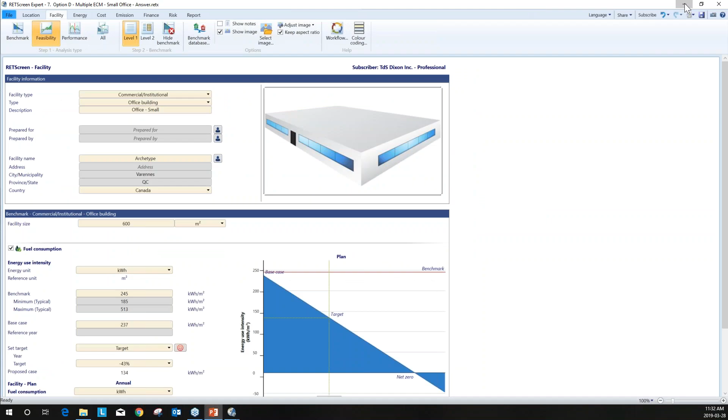So you add the event log as any data table, and of course that can be a data source as well that you can import. So if you have a spreadsheet of a bunch of data, you can import that directly as an event log, and then you can overlay it.

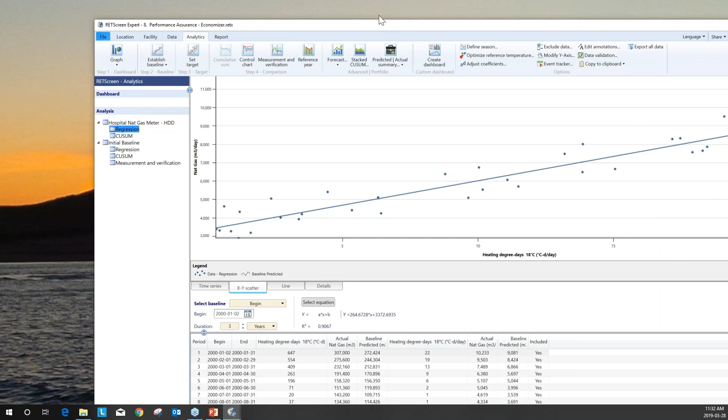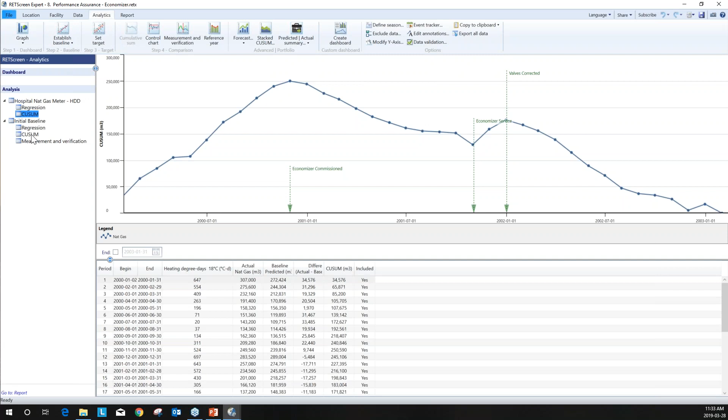One of the fun things to do is select a bunch of them and overlay them on your CUSUM or on your M&V graph, and see what things line up and what show. Here Stephen has a couple of event logs that are lined up on the graph, and that's one way to log those.

And in terms of adjustments, there's a couple of ways. If we had more time, I could show backcasting. There was a question about backcasting. What I've done is I've created a subordinate secondary regression, and I backcasted with that.

So in fact, you create another set of data. We can add columns in here which come from computations within the tool, so we can add and subtract. We can create a calculated column within our data tables, and we can either manually input the adjustments, say for computers being added to a building, or we can have a secondary regression.

Maybe one of the things we could do, Kevin, is through the folks at EVO, we could provide a sampling of different tools that can augment what we've talked about here today, which would answer some of those questions. Yeah, I agree.

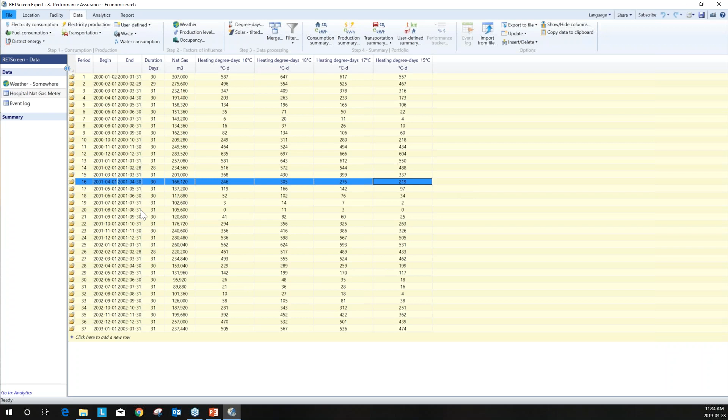Okay, do we want to take more questions, or should we wrap it up? We've gone already a little bit over time.

I just want to show one thing, Kevin. Creating reports in RETScreen is blindingly easy. You simply click on the create report function in the report, and then you get all of these beautiful graphs and charts. And in fact, you can go in and annotate them.

You can put your own text underneath. So explore the report function, I think you'll be pleased. I use this all the time for a production type of assessment methodology we use. Very, very quick, very easy to use, and a powerful tool. Use the report function, and definitely part of any good M&V is a good report.